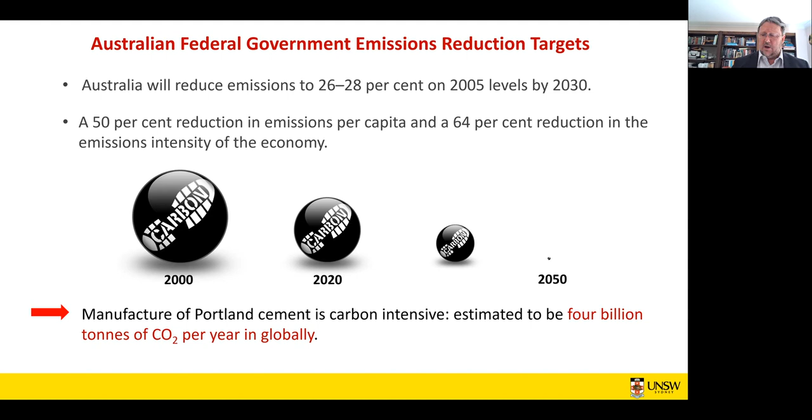So irrespective of whether the federal government wants to talk about carbon neutrality by 2050 or 60 or whatever as soon as possible, every state government, every territory government has already committed to carbon neutrality by 2050. There's a lot of conversations happening now, particularly around how do we make this happen, and very much from the government business enterprises such as roads and the like.

I get often asked a little bit about vision for the faculty on climate change and other things, but particularly about what we see in the next 5 or 10 years. I firmly hold the view that we have in place today the pathway to get to carbon neutrality. And where we don't have the solutions, we've identified the research needed to actually deal with that.

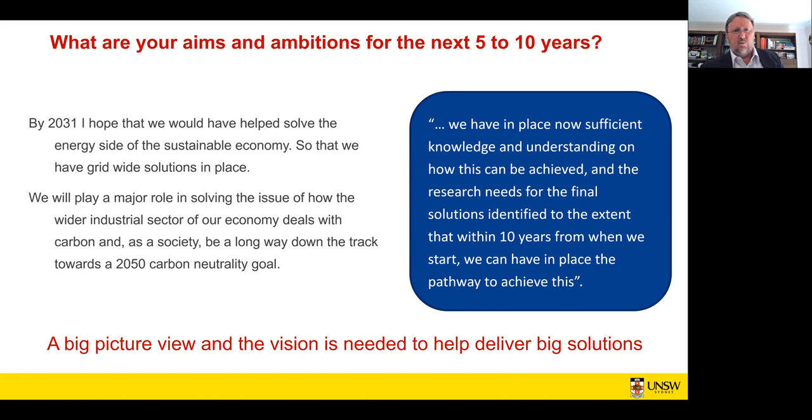So when we talk about power to X, for example, the battery side, battery storage, there's a lot of research going on at UNSW and around the country, and indeed around the world, on how this is achieved. So these things are clearly identified. The question comes about what are we going to do on our side, the industry side of the economy? We need big vision, and we need to address our share of what is a very important problem. It's just too important for us not to do this.

We talk about 3 ways. The pathways are either through dematerialization, using higher performance materials with significant efficiency gains; through substitution, taking a higher carbon product out and replacing it with a lower carbon one; or one that we don't talk about so much, carbon capture, storage and reuse. If we are going to deal with not just the cement industries but other industries that also release carbon, I think this is an important part of the story that we need to consider.

Now, in 2015, for those who may remember, my student Yen Vu talked about their work in ultra-high performance concrete and their pathway forward. They're working on developing substantial infrastructure without standards, using science and technologies, the way it was done 150 years ago, before we had standardized methods and regulations.

Here we see the bridges they're building. These are not trivial infrastructure, these are mainstream structures. And here on the top left is how you demonstrate that through large scale testing. So there are standards being developed in France, standards being developed in Canada. An annex to their bridge code exists now, and they're developing the next generation of that. We do not have anything like that in Australia.

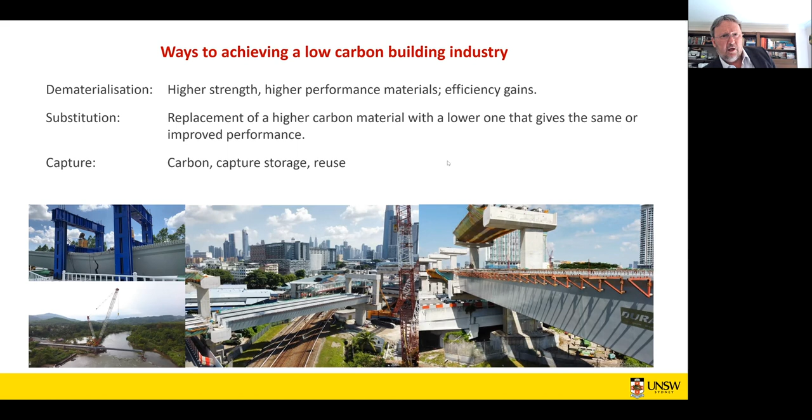And the question then is: is it chicken or egg? Do we not have a high strength concrete, ultra high performance concrete industry because we don't have a standard and we can't find a way of regulating through it, or because we don't have enough experience in building these to develop a standard? This is really important, because standards can be a real blockage, a real roadblock in the way of moving from innovation and innovative product development into implementation.

I was quite privileged a few years ago to work with Howard Titus, Mario Tabone and John Biondo with Boral on their product for Aspire. At that time, 120 megapascal concrete, high stiffness, high replacement of cement, but a standard that didn't allow for anything above 100 megapascals. In the end, a question came into the committee: why are we restricting the standard, when in public comment it was argued it should be 120?

And the committee looked at it closely and said, well sure, but what don't we know? So we don't have data on shrinkage, for example. We don't have data on creep, elastic modulus, and things like this. But these are things that are all measurable in standard ways. So we don't need to have that solved to get community data to put into the standard on these - we can actually measure them.

Then what can we use? What do we know well? Our models are based on fundamental physical principles - design for columns, for example, we know the basic fundamentals of that, and therefore we can have high confidence in the way that we deal with these issues.

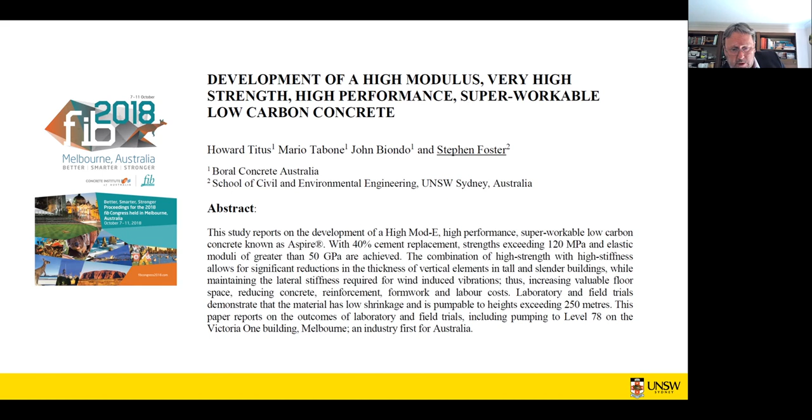And it got put in. And then in 2020, the amendment, some of the additional information about creep and shrinkage got added at that time.

Cleaning up the industrial carbon is a challenge though. We talk about cement production, and we know the process of changing calcium carbonate through to lime, and then the release of carbon dioxide to the atmosphere.

But it's not just our industries that have this. We look, for example, at silica production. Silica production is so important to the photovoltaics industries. It's the basis of most, 85 to 90%, of the way solar cells are built, coming out of technologies, out of Australian technology, out of UNSW, and it's penetrated the world. It's revolutionising the way that energy is done. You only have to look around the houses in each of our suburbs to see how much local uptake of this has been.

But silica, the production of that is actually very carbon intensive. In fact, 1 tonne of silica, depending on the purity you want to get to, produces 2.5 to 5 times the amount of carbon dioxide. That's up to 5 tonnes of carbon dioxide for every 1 tonne of silica. In the photovoltaics, we get the benefit back over time.

But what about other areas, such as silicon chips? We can't work without silicon chips. I can't drive my car these days without the computer on board managing how the engine works. These are so fundamental.

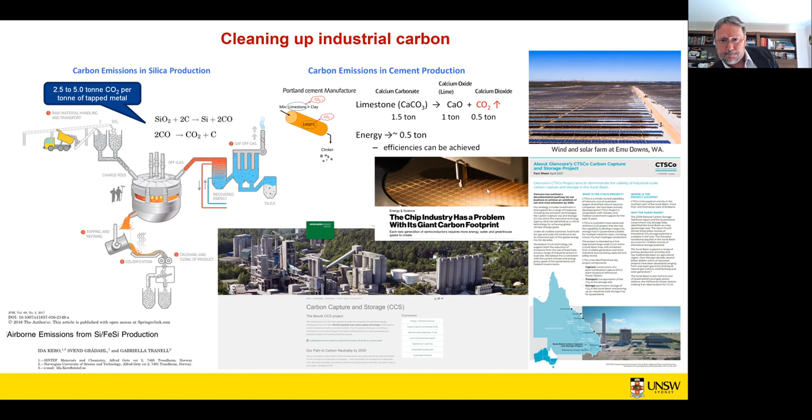And we see already in Norway, the Brevik projects coming on board, high volume carbon capture and storage for the cement industries, using the technology and the spaces made available in the oil industries. In Queensland, Glencore's project again demonstrates the feasibility of carbon capture and storage. So these technologies are not new, they've been discussed for a long period of time. But to me, they are an important part of a bigger solution to cleaning up industrialised carbon.

I want to give two examples in the time I've got left. One where we talk about substitution, one where we talk about high performance materials.

So in substitution, we've been doing a lot of work over the last years through the CRC for low carbon living, and the strong support that we got, particularly from the ASA, the Australasian Slag Association, and the Fly Ash Association as well in this project.

And we're looking at ways of getting some demonstration projects out, acknowledging the large scale work of Wagner's, and showing that this technology works at scale.

So we were looking at particularly a project here in a pavement trial. We wanted to look at whether geopolymer concrete was a substitution for pavements, because pavements take up very much of the concrete product. And this is where it is.

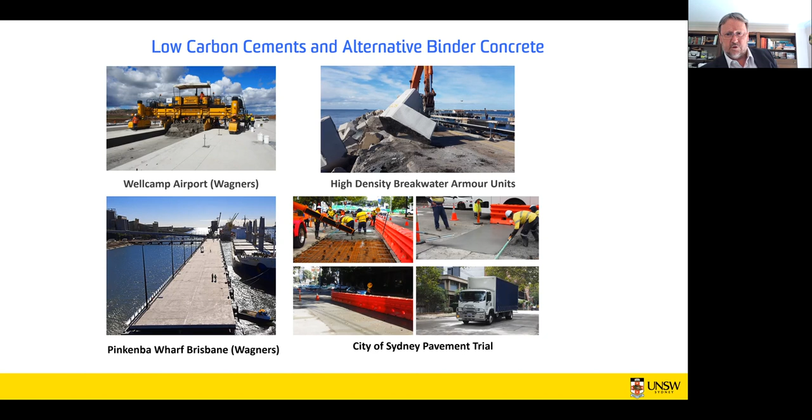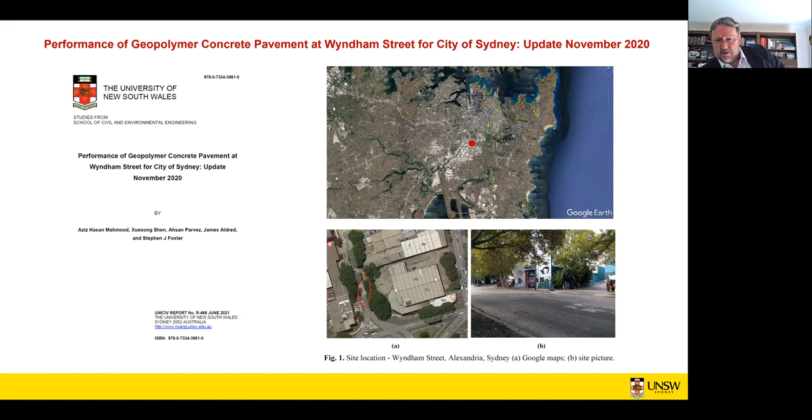So it's a very high traffic area. It might not look it, but it is. And this is the area down here. We put in place 30 metres of pavement, 3 metres wide, 1 lane wide, and half of that was geopolymer concrete, and the other half was conventional concrete.

And here's a very young James Aldred sitting there testing the concrete using the rebound hammer. We had a quite challenging project because the road could only be closed Saturday morning at 7 a.m., because you can't wake up the neighbours before 7, so you can't start earlier.

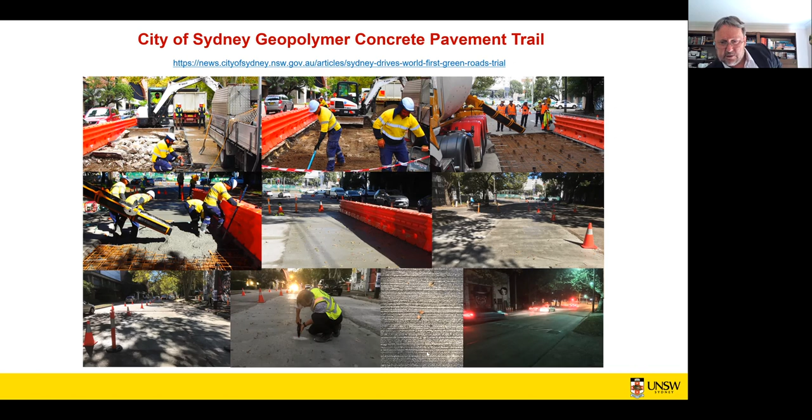And the road had to be open at 5 a.m. the following Monday morning. So we had 36 hours after the completion of the casting of the concrete for it to harden to get to sufficient strength to open the road. And you see also here on the right side, the broom finish that was required for that particular project.

You can see the rebound hammer tests. After 36 hours, we've got about 22 megapascals of strength. At 597, 600 days, we've got about 45. So it's still performing, it's still hard. There's no indications along the wheel lines in either pavement, both are performing quite to expectations.

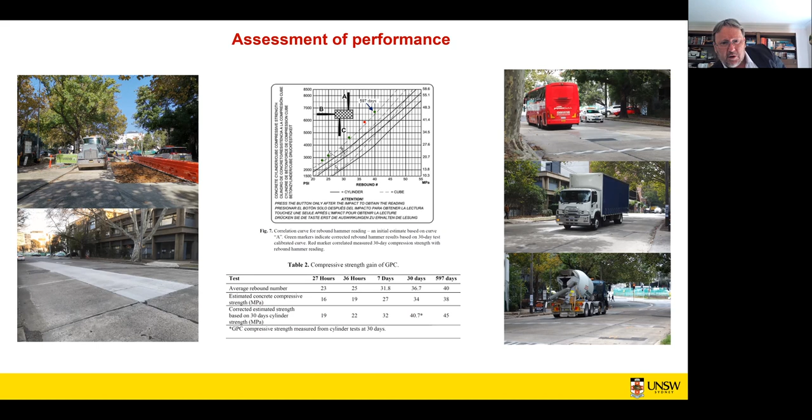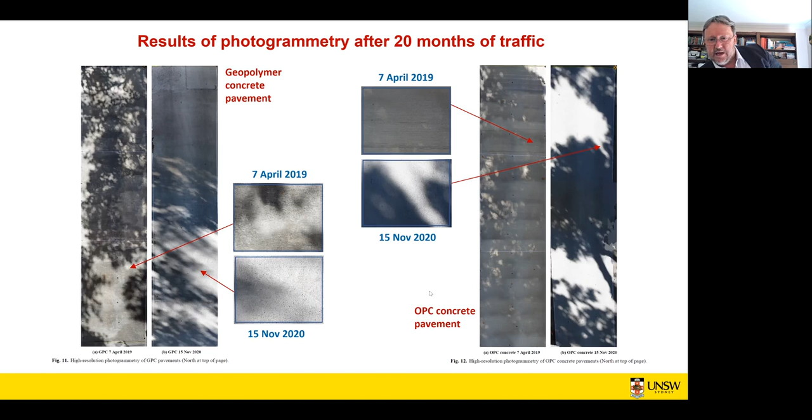On the left here is the geopolymer concrete. You can see here the 7th of April, and you can see the little ridges coming in from the broom finish. Of course they've all gone now, they actually went within the first year, as did in the conventional concrete. So I question what the point of doing that work on the broom finish was. But both are performing similarly, both performing well. There's no real indications of any significant wear and tear on this at this time.

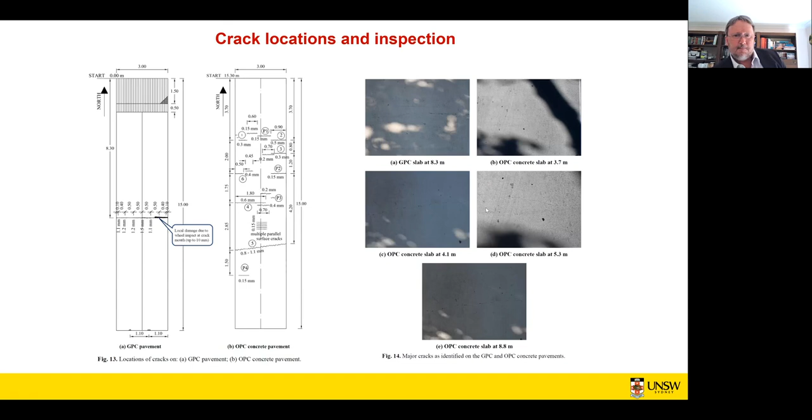On the issue of cracking, we've got one crack in the geopolymer concrete. It's actually a flexural crack. I suspect there's some subsidence issues with the way the sub base was done. Not dissimilar in the ordinary Portland cement concrete slab, again it's a bit more shrinkage cracking in this, but nothing concerning, everything as you would expect it to be. Again, a little bit of a flexural crack happening at one stage there. But here's the cracks showing on the resolution on the left and on the right. It's performing pretty much as you would expect. We'll continue monitoring that for 5 years or so.

The next monitoring period will be April next year.

In the second project I want to talk about is high strength steel reinforcement. This is a project where InfraBuild funded a linkage grant to do some testing on high-strength concrete columns. I remember Graham McGregor coming to my office and showing me this steel they'd been able to develop, high strength, more than 800 megapascals, and it was bent around the size of a 20-cent piece.

So very high ductility product as well as strong. The question is, where can it be best used? Where can the performance of these high strength materials be used? Columns is one area. The question is, have we maximized it yet? We started that work only about 5 years ago, probably one of the shortest periods of time from when the work started to getting it into a standard. But have we actually maximized the benefit from that reinforcement? That's something I'll talk about in a minute.

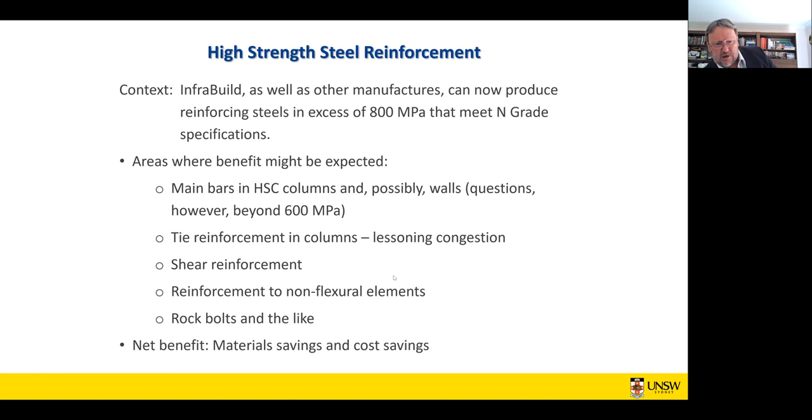Tie reinforcement, shear reinforcement is an area I think we really need to look at as well, because essentially if we can increase from 500 megapascals to 750 megapascals, we can use a third less material.

So we tested 39 columns of different sizes and different reinforcement arrangements. The concrete strength here is about 110 megapascals. The reinforcing steel, as you see, is 520 megapascals for the longitudinal steel, which is conventional, and then a 650 grade material, all tie steel was 810 megapascals, so it was a high strength steel.

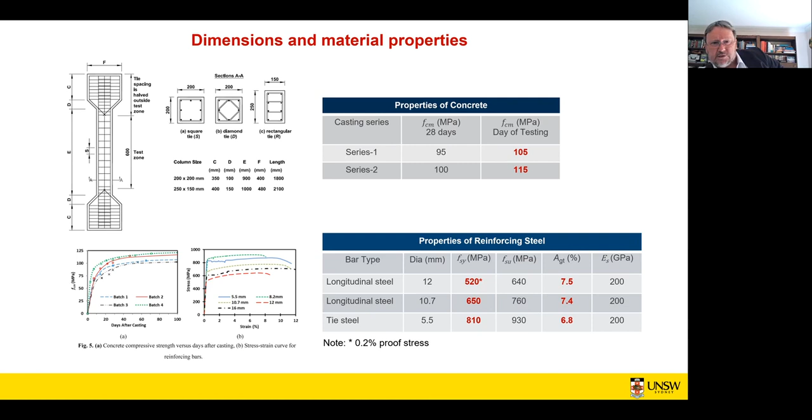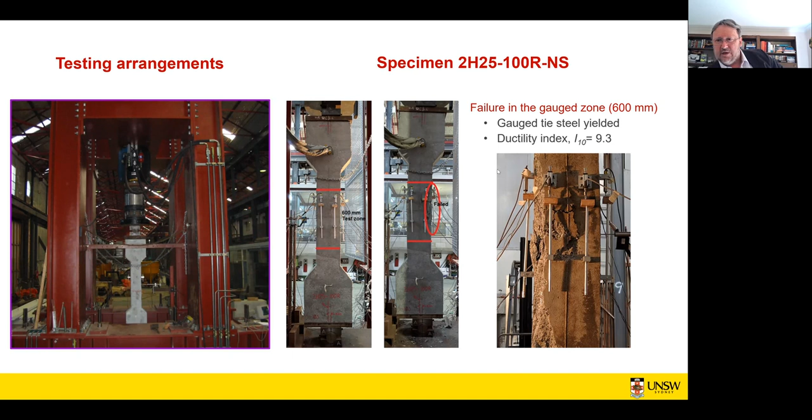The one on the right here is actually a very ductile section. The I10 value here, a value of 1 is something that's perfectly brittle, a value of 10 is something that's perfectly ductile, and this one here you see is very highly ductile. Anything over 5.6 is what we're looking at for AS3600.

All right, so let's have a look at the results now. I've plotted here two curves, the solid line, perhaps look at this bottom left one, a bit more clear. The solid bottom line here, that's the model with AS3600, and the dotted line is ACI 318. Now it appears that ACI 318 is a better predictor. The problem is ACI 318 is a poor foundational model for high strength concrete, it was developed for members of 40 megapascal concrete, and it was never changed. You see in many circumstances, these little green dots here are for a 520 megapascal longitudinal steel, so conventional strength longitudinal steel.

The ACI model is quite a poor predictor. It actually overestimates the strength, even though it gets the strength about right for the high strength steel. The high strength steels here are the blue triangles on this specimen, and the green squares on that specimen.

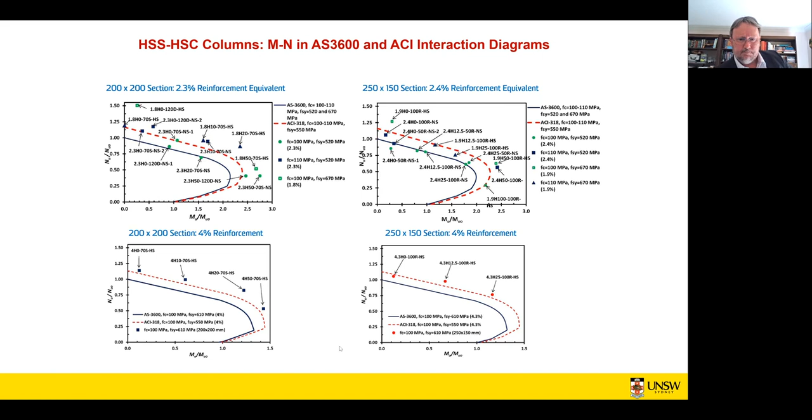We're not capturing with great accuracy the test results. We're leaving a certain amount in the cupboard, if you like. We're not getting as much out as we can or should be doing. So let's have a look at that in a little bit more detail.

One of the important parameters we need to think about is the strain in the extreme compression fibre. In AS3600, we use a value of 0.003 for beams in bending. Then, depending on the gradient, the steel, which may be 60 or 70 millimeters below the surface, will have a value less than 0.003, something like 0.0025 or 0.0026.

Now, 0.0025 is the strain for a 500 grade steel, so we're not getting any additional strength in that compression reinforcement because the model is dictating a strain at the extreme compression fibre of 0.003. And 0.003 is not a bad lower bound predictor, but it's a fairly poor mean predictor. If we always err on the conservative side, those conservative errors add up and we end up with a conservative model.

The Canadians look at means and then make the adjustments at the reliability level, and that's a much more sensible approach. They use a strain of 0.0035, which is a much better value of the average. If we make just that change, nothing else, to the standard, we see an improvement of not an inconsiderable amount.

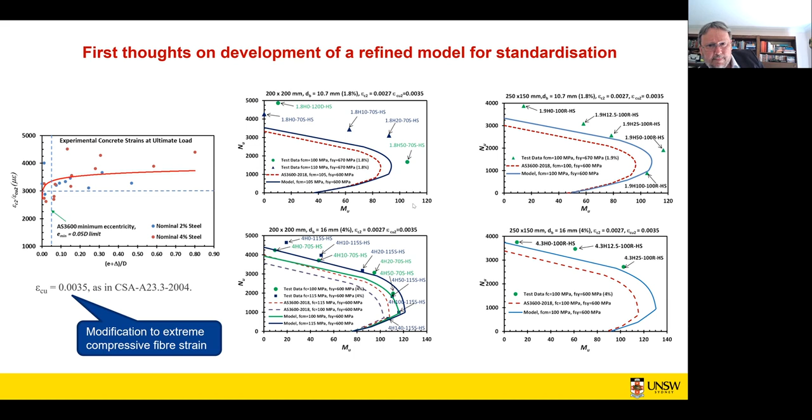Then the question is, can we go further than that? The traditional way we design columns is with this alpha factor here, which represents the point when the cover spalls away from the column and we basically lose the section. Let's take the core and think about what's happening to that.

If I confine the core sufficiently, I know two things: I'll increase its strength, but more importantly, I will increase its strain at peak strength. It might increase the strength only by a few percent, but it increases strain considerably.

I'm not going to go through these models in detail, that's not so important. But let's say we developed a model for the core and a model for our traditional column, and simply looked at the maximum of those two conditions. We're required to use 1% steel, 1% confinement reinforcement, irrespective of high strength concrete columns.

We see here that anything less than about 450 millimeters square, we don't get any benefit. So our lab concrete doesn't show the benefit because our columns aren't of sufficient size. But if our column was a metre square in a large building, we actually get a 15% benefit. Then if we increase the core capacity from 1% to 2%, that goes up to 20%.

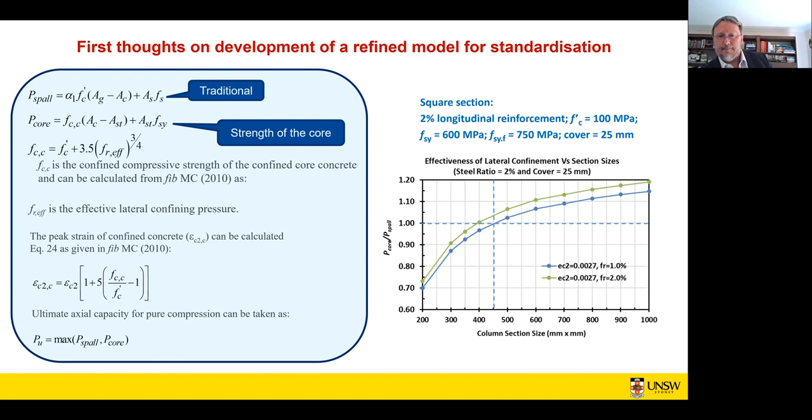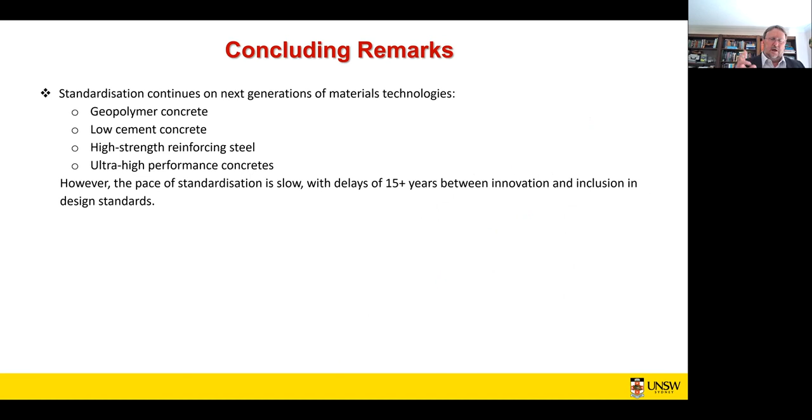So I just want to conclude here very quickly. Standardization continues on next generation materials and products. I think one of the problems, though, is the delay. 15 years to get something into standards is too long. Even if today we agreed, fully agreed, committee agreed, voted, it could take 3 years for it to get into the NCC and be called up. So these things are far too slow. We need to be far more adaptive than that.

So we need to increase the pace of standards development if we want to be responsive to change. And then finally, we need to provide significant commitment and investment to research into low carbon industries and products, into how we do big things. How do we test a column that's 600 mils square? We need governments, industry, and researchers to define the issues, and then we need to find the funding to do it, because the rewards can be substantive, but it can't be done without a whole of group, whole of government, industry and research investment.